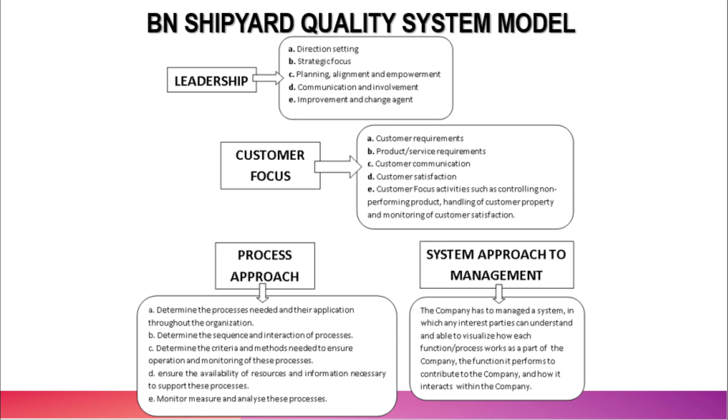Under involvement of people, we have top-down communication, responsibility and authority, training, empowerment, and involvement. For factual approach to decision making, we have management review, quality objectives, use of data analysis, monitoring and measurement of production, and maintaining and improving the QMS.

On continuous improvement, we have continuous improvement projects and corrective and preventive actions taken. Lastly, on the mutual beneficial supplier relationship, we have supplier evaluation, outsourcing, information requirements, and improvement opportunities.

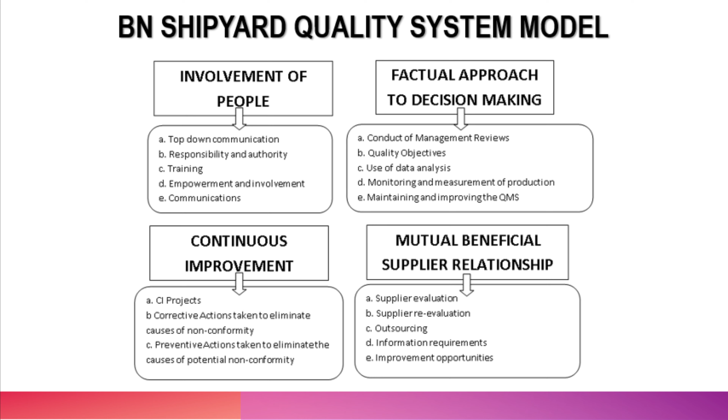First, identify the exact needs and demands of the customer in the target market. Second, identify how the product will satisfy the targeted customer based on specific product characteristics. Third, identify the relationship between how and what.

Next, develop the importance ratings, as House of Quality refers to using the customer importance ratings. Next, evaluate competing products or services as the main objective. Lastly, determine the desirable technical attributes.

Now we move to building the House of Quality, and what every part of the house consists of. The left side of the house contains the 'what' or wants. Here customer requirements, needs, and priorities are placed.

The right side of the house is formed by competitive assessment. Here customer priorities are compared with appropriate marketplace offerings.

The 'attic' of the house is formed by how, the technical design features and characteristics of the offering to meet the customer requirements. The roof of the house is represented by design relationships that describe the interrelationship between the design features. The foundation involves the target values as objective measurements for assessing each characteristic.

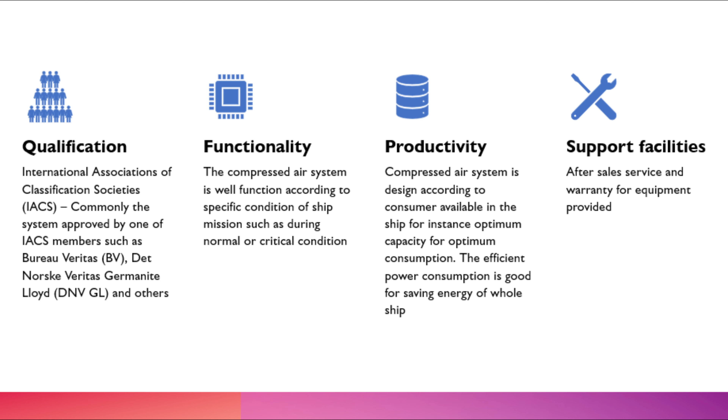In this slide, we take an example for a compressed air system in which a solution to a complete compressed air system in a naval ship should be analyzed, combining all requirements to be served. Also, the weight and dimension, compact and robust, maintenance and user-friendly aspects shall be considered in the list of customer requirements.

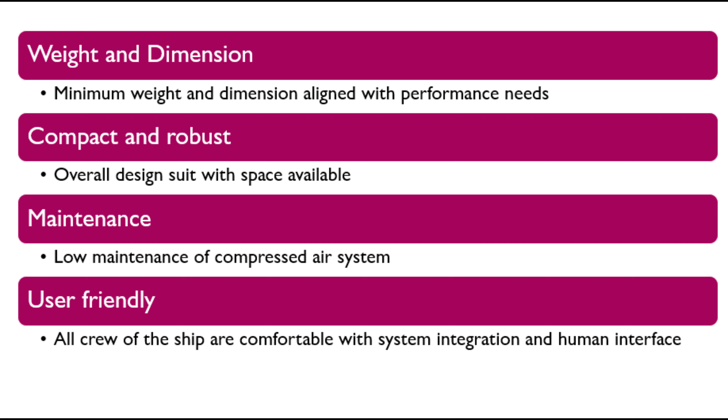Now we move to the list of technical descriptors. In this list, we have marine type, reciprocating type, capacity, integration, steel, aluminium and copper. For marine type that can withstand sea conditions, reciprocating type consumes efficient productivity, capacity is needed for all consumers in the ship, and integration is needed between pipeline and equipment such as tube and hose.

Also, material available for all equipment and accessories, material that's suitable for integration, and material used for connection and fitting.

Next, on the interrelationship between hows. This is important to identify the priority of each element. For example, integration for a compressed air system is more efficient using aluminium or copper material rather than steel. Based on the table here, it shows that the interrelationship between technical descriptors, or hows, helps prioritize which elements are very important for compressed air system selection.

A rating from -9 to +9 is allocated for each element of integration. Thus, some elements need to be concerned according to the highest rate. The highest rate for integration is suitable to use either aluminium or copper because of the high pressure distributed along the system. Other than that, using aluminium for a marine type compressor is not recommended because of reliability.

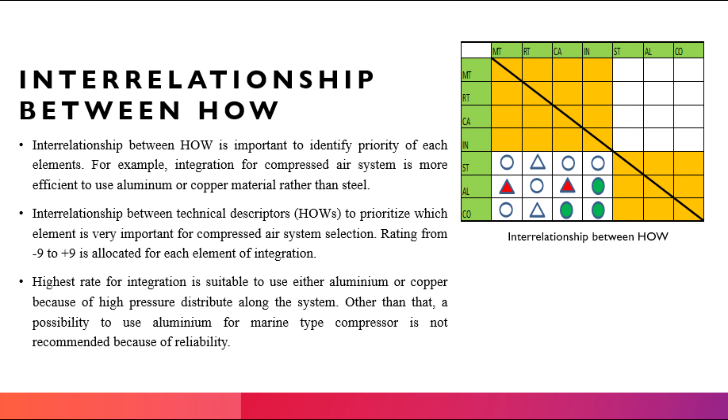Okay, this figure shows the house of quality for the compressed air system study. A rating scale has been selected for the customer requirement list and technical descriptors list. There are 8 characteristics from the customer that are very important in order to select a suitable compressed air system.

From the 8 characteristics from the customer, technical descriptors came out with 7 elements to fulfill the requirements. A rating has been allocated from 1 to 10 for both characteristics. This is what we explained just now on the house of quality for the compressed air system.

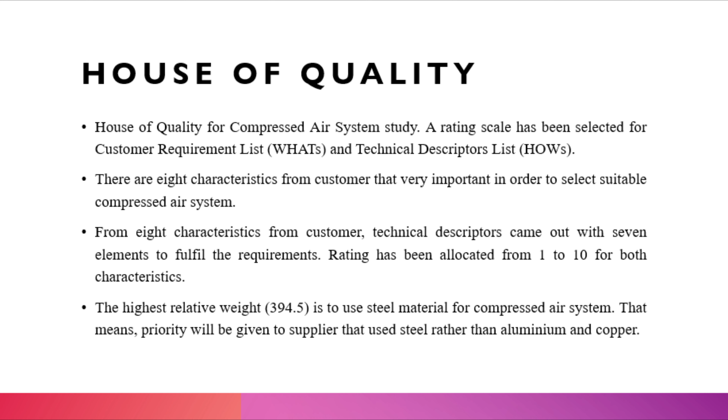Okay, let's move to the best practices and advantages of application. First, understanding customer desires. Many times customers need an outside perspective to discover what they really need to build their product or process. The goal is to understand customers perhaps even better than they understand themselves, to open their eyes to ideal solutions.

Second, understanding customer priorities. During the interview stage, get to know the exact customer needs, but then break those needs down into prioritized parts in an effective manner. Then weights are assigned to each house of quality based on what is most important to the customer's needs and requirements. How well each need is carefully met is ultimately how the customer will judge your solution's value in the market.

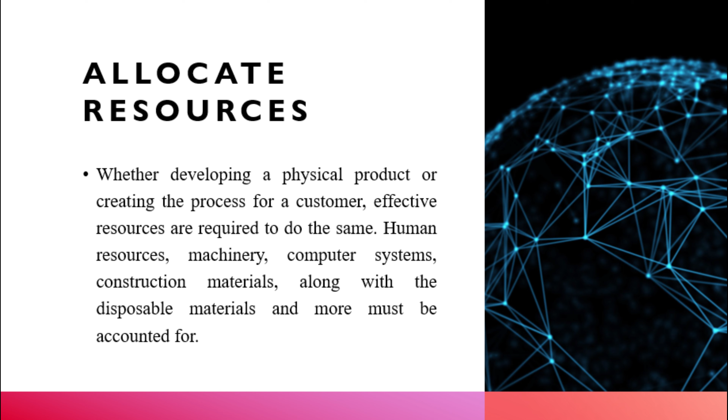The last one, allocate resources. Whether developing a physical product or creating a process for a customer, effective resources are required to do the same. Human resources, machinery, computer systems, construction materials, along with disposable materials and more, must be accounted for.

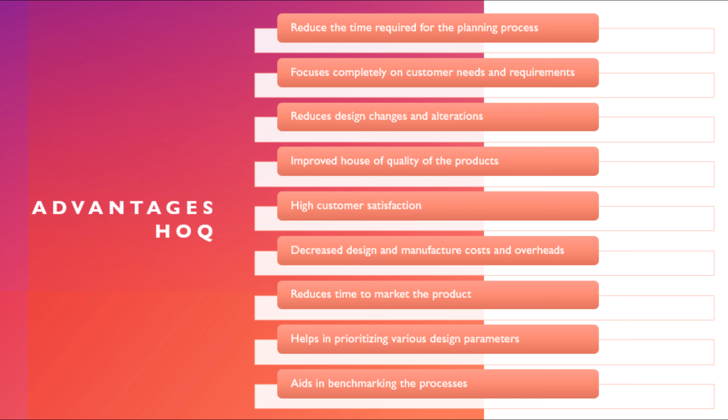As a conclusion, one of the tools in total quality management can be used to meet customer satisfaction: quality function deployment. It is strongly recommended that the result of QFD can be utilized in order to link between customer requirement and technical point of view. Okay, that's all. Thank you.